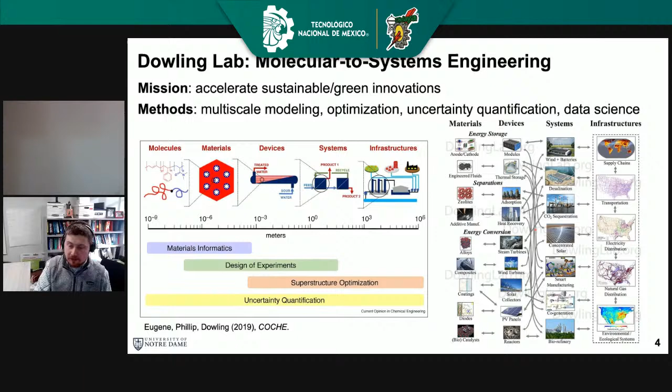So compared to my colleagues at Notre Dame, a distinguishing aspect of my group is we formulate everything as a mathematical optimization problem. So we think about writing objectives and constraints subject to either continuous or discrete variables. And we apply these to a lot of problems and collaborate with about 10 different research groups on campus. So everything from novel separations to carbon capture to additive manufacturing to desalination to systems biology, and finally to energy markets and energy infrastructure that I'll talk about today.

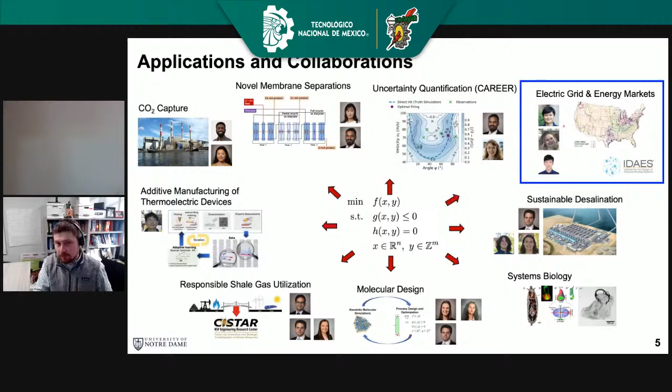Cutting across all these applications are 3 main pillars or 3 main ideas that our group works on. The first is molecular systems modeling. So how can we use models to set material property targets? So here's an example of thinking about membranes for removing lead or other contaminants from water, and understanding how much membrane material you would need is a function of 2 material properties. And this can help guide our experimental collaborators.

And the second pillar is optimizing experiments. So here we work with our experimental collaborators to think about how to build mathematical models and then apply data science tools like model-based design of experiments to think about really what's the minimum set of data that we need. And then finally, what I'll really be focusing on today is scale bridging models. So when I showed that molecular to infrastructure, how do we connect those models across scale and how do we deal with complexity? And a lot of this is using machine learning ideas.

So shown here is looking at some reaction kinetics where we have a hybrid model that contains both a simple component and a machine learning component to take care of the error in that. So I'm going to be talking about energy markets and this last column, scale bridging models, and I'll bring that out throughout the talk.

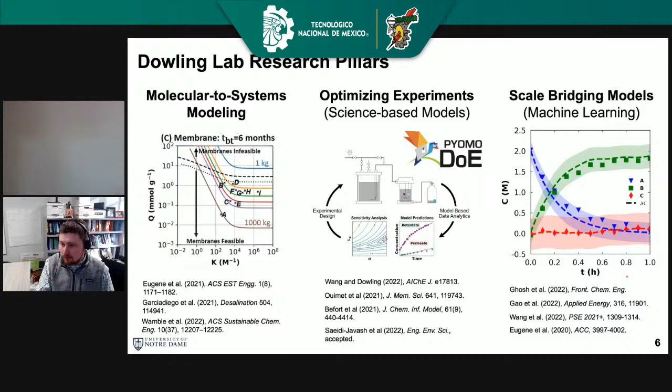In 1 second, I'm just going to check a microphone setting.

Oh, it is fine. Everything is fine. Okay, I was hearing a little bit of an echo on my end.

Okay, so now to get into the main talk. So as you probably all know, we have this really big energy transition ahead of us. There's a lot of interest in sustainability. So here's a map of the United States. Every colored box shows a different state and some of their renewable energy targets. But integrating more renewable energy is not without its challenges.

So shown here is the so-called duck curve. So what this is, is the average power demand as a function of time, from midnight to noon to midnight, for a day in California. And each line corresponds to a different year. So we see here, starting with 2012, the average electricity demand. And as each year progresses, this plot becomes more and more extreme.

There becomes less and less net electricity demand in the middle of the day, and there becomes more and more of these extensive ramping events. And this is because of solar energy, which is producing a lot in the day, but then you have these ramping events due to the sun setting. So this is one challenge, this daily variability. Other challenges are seasonal and caused by unplanned events.

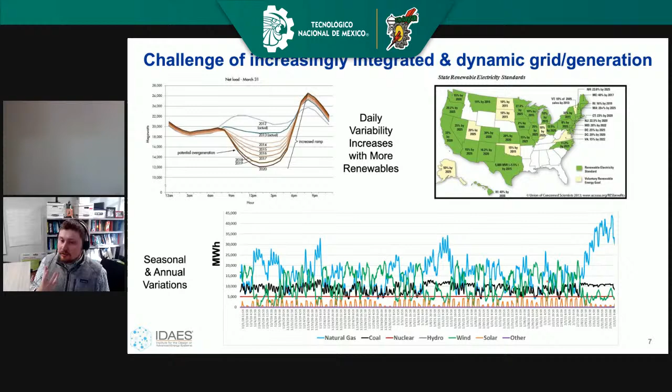So what's shown here is generation, so electric power demand in megawatt hours, shown during a blizzard event in the United States over a couple of months. And what we can see here is the fluctuation in different modes of power production. So a question is, how do you deal with this variability, this daily variability and this seasonal and up to annual variability? And one leading idea is to design integrated energy systems that hybridize multiple technologies.

So thinking about multiple energy inputs, whether it be nuclear, gas, fossil fuels, solar, wind, batteries, into this integrated system that can produce multiple products like electrical energy, hydrogen, chemicals, heating or cooling, and is integrated in a way that synergizes these different technologies and exploits their coupling to provide more flexibility to the grid.

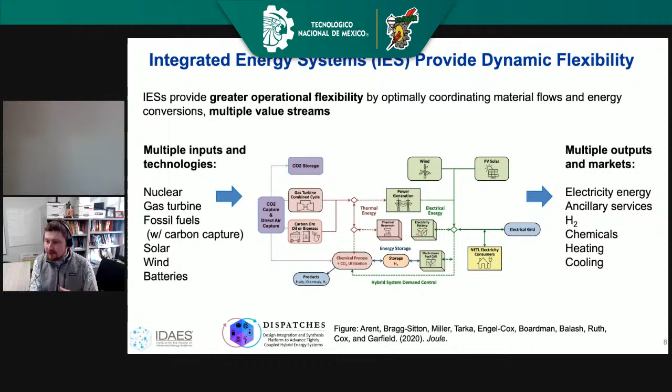So a key question here is, how do you design these systems? How do you operate these systems? And how do you control these systems? And for the rest of the talk, I'm going to discuss how we use mathematical optimization to do that. Before I get into this, I want to give a background on energy markets in the United States.

So energy markets in the United States are just really fascinating, broken up into about 10 different regions or 10 different markets. I'm going to focus on California just as an example. Every dot in this plot is a node in the California electric grid. There's about 8,000 nodes. And you can zoom in at every node, and there are electricity prices set on 3 time scales. There's a day-ahead market that sets prices in every hour. There's a 15-minute market, and then there's a 5-minute market. These are referred to as the day-ahead and the real-time market.

What these are, are histograms showing over the course of an entire year 1 to 3 p.m. prices. And what we can see is approximately normally distributed in the day-ahead market. But as we go to these faster time scales, we get more and more extreme prices, and this starts to become bimodal. Shown here is a time series over about a week. And what we see are a lot of evening price spikes, which are due to that duck curve I previously discussed. And we see a lot more volatility in the faster timescales. If you're curious, we've even done some Fourier analysis and looked at what the dominant modes are, and I'll refer you to these papers.

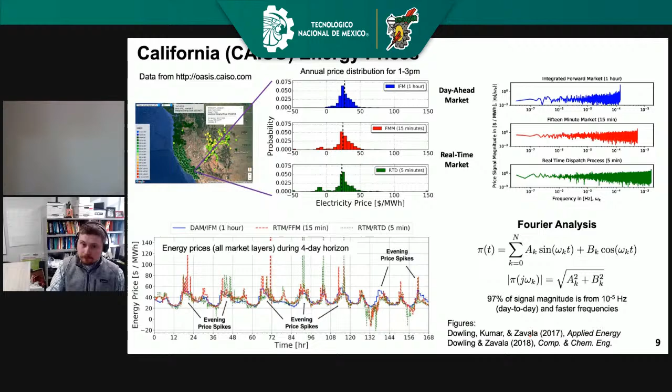So what we have in this figure is these three time scales, but now looking at them across one snapshot in California. So these are simultaneous prices, and we even see a lot of spatial temporal variability. So if you want to think about energy systems in California and prices, in 1 year, you have about 1 trillion prices. And if you just were to represent this as text files, uncompressed, it'd be about 500 gigabytes. There's a lot of localized variation at slower time scales, and there's system-wide variation at really fast time scales.

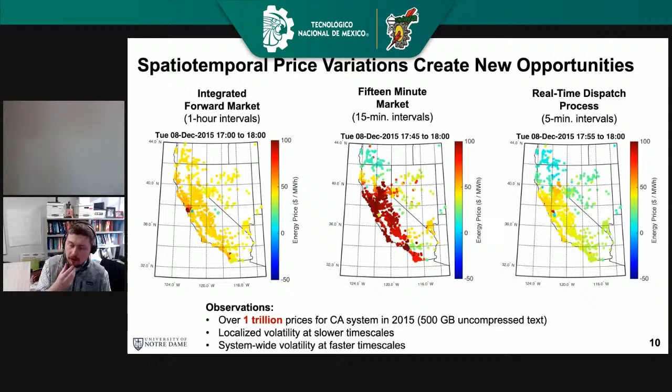There's really rich literature in the process systems engineering community about how to transact and how to interact in these markets from a resource perspective. There's a lot of scheduling literature thinking about time-varying prices. There's optimization literature thinking about reserves and interruptible loads, frequency regulation, and chemical engineering systems. So in the context of this really rich literature, I want to talk about how to make these market participation decisions and co-optimize how we participate in the market and how we design and operate integrated energy systems.

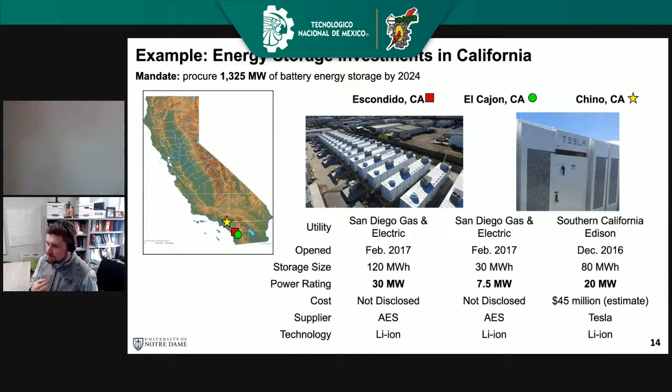So in light of these installations, we wanted to ask the question of, if I take historical price data from California, what is the revenue potential for these batteries that are being installed? If these batteries were to participate in the market, how much money could they make? So here we can formulate a variation of this price taker optimization problem, where we want to maximize our market revenue, assuming perfect information, constrained by bidding rules, constrained by the market dynamics. So we're going to assume price taker, and constrained by the physics of the battery system.

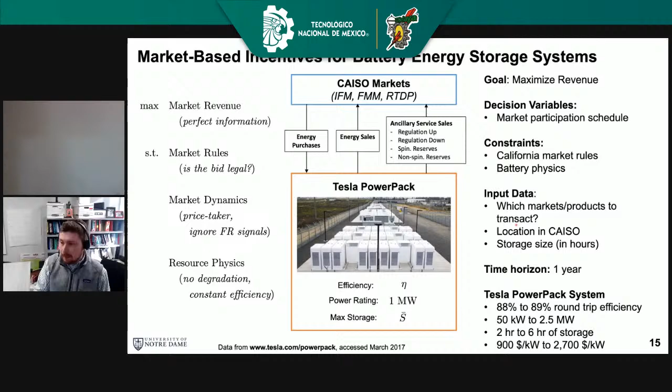So we're going to be able to interact in these three markets. We can purchase electricity, we can sell electricity, and we can provide ancillary services. And we're going to characterize our battery with some type of round trip efficiency. We're going to fix the power rating to 1 megawatt, and we're going to optimize the storage size. So our decision variables are going to be, how do you participate in the market? And the input data is going to be the prices. So we ran this analysis for a bunch of different storage sizes in hours.

So this is analysis for one node in California, one set of price data. We then repeated this for all the nodes in California that we had data for, and we're focusing on full market participation. And what we found here is there's actually some variability in the market payoff, and it goes from a 1-year payoff period to almost a 2-year payoff period. And what we found was really interesting, that the best payoff period based on the historical market prices is actually in the middle of the state.

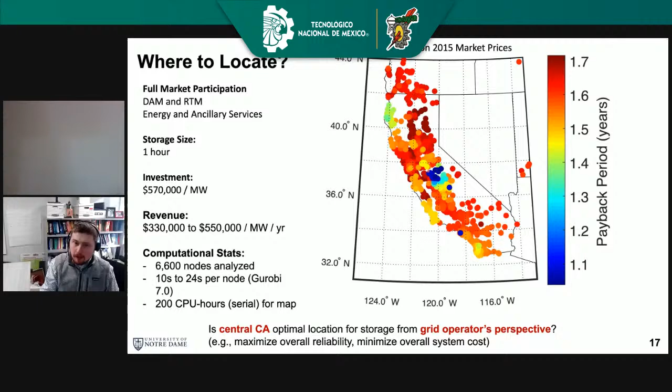So this is a nice first analysis, and what we learned from this is the importance of transacting both energy and ancillary services. And we thought about a battery, but one of the key aspects of a battery is degradation. So then in the next part of this study, we changed technologies to a sodium sulfur battery, and we extend our optimization formulation to think about degradation. So we added to the optimization model this degradation counter, that as we charge and discharge the battery, we slowly change the upper bound on the amount of energy that could be stored in the battery. So we're very clever about how to write this, so it becomes a linear program.

We can then formulate the program over multiple years. So with 5 years, you have about 4 million variables, about 6 million constraints. But because it's a linear program, you can solve it with Gurobi or other commercial optimization solvers in about 2 CPU hours. So that's actually really nice. So what we did is we then took this model and we resolved it for a bunch of different market participation modes. So what we see on this plot on the left is looking at the economics.

Each of these clusters is thinking about, am I transacting day-ahead energy, real-time energy, or in both markets? Within each cluster, there's two groups. The first group is energy only. The second group is energy and ancillary services. So what we're showing on this plot is net present value. This plot is organized the same way; it's showing battery capacity. So what do we find? Well, consistent with our previous results, we find that it's really important to provide those ancillary services. They provide a huge bump in net present value, and they facilitate a really big bump in energy storage.

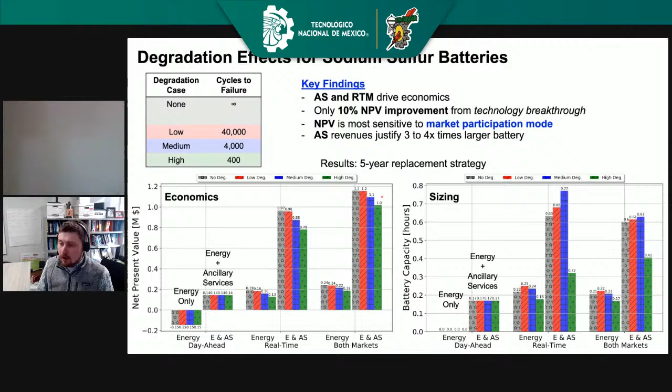You could decide to adjust your schedule for buying and selling energy, or arbitraging energy, to avoid too much cycling and to manage that degradation. We then took this a step further and resolved the optimization problem with a bunch of different replacement strategies. So do we replace the battery every 1 year, every 2 years, all the way up to every 20 years?

And then what we plotted was the revenue that we would get for no degradation and those 3 other degradation scenarios. You can also compute a very optimistic upper bound where we would expect these lines to converge for no degradation at a replacement lifetime of infinity. So this corroborates the results on the previous slide that show that you can still manage degradation over really long time scales by adjusting how you participate in the market.

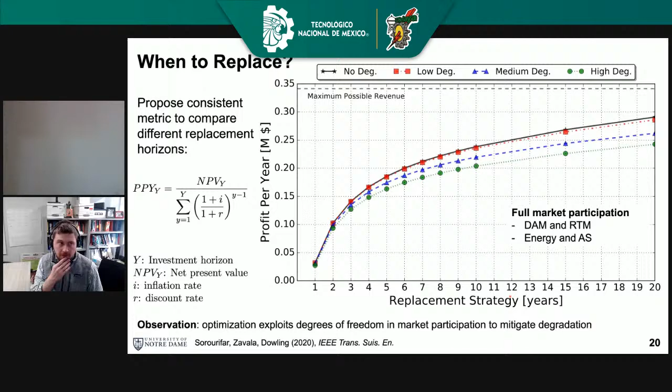So the conclusion of this part 1A of the talk is it's really important when thinking about energy systems that have storage that are participating in a market to be thinking about multiple market products, because arbitraging energy on the day-ahead market is really not that profitable. You need to be transacting ancillary services. So we've done a bunch of work looking at batteries, and we've also done some work looking at concentrated solar power plants for this.

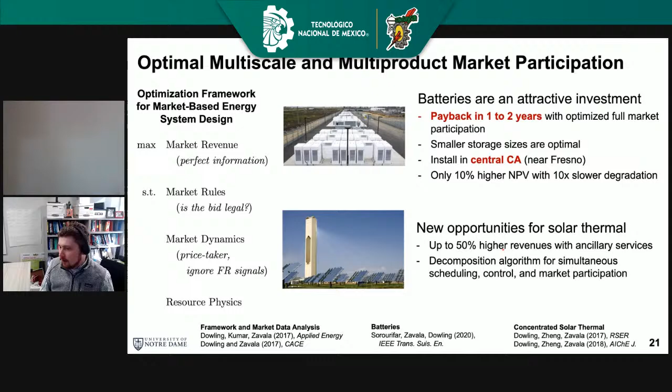Now, maybe a limitation of this work so far is we assumed perfect information. We were computing operating profiles assuming that there was no uncertainty in the market price and you could forecast the future. So that raises a natural question: what about uncertainty? So we've done a little bit of work in the group. One was to propose these autoregressive Gaussian process models to forecast uncertainty. These provide nice confidence bands. And another work that I'd like to talk about today is dynamic mode decomposition.

So I'm a member of the Society for Industrial and Applied Mathematics. And at least before COVID, when you'd go to their conferences, they'd have a book sale. And I'm always a sucker for the book sale. I almost always buy some books. So when I went to SIAM UQ in 2018, I bought this book, Dynamic Mode Decomposition. I heard a lot about it. It had a really nice cover, and I got curious.

Shortly after coming back from that conference, I had a really bright undergraduate student, Clay Elmore, ask me about research. I gave him the book and said, I have this interesting data set. Let's see what we can find from this. So what we're going to do is take these spatial temporal energy market price signals, and we're going to ask, can we come up with a really fast way to forecast future price signals using dynamic mode decomposition?

The main idea behind dynamic mode decomposition is we want to find the best small or low rank linear system that approximates a dynamic system. What I mean by dynamic system is you can think of the price at each node here as a state variable. So maybe I have 8,000 state variables, and I want to know the dynamics of how prices evolve for each of those state variables. The way that this works is you have all of your time series or spatial temporal data that you can put in the matrices X and X prime. They're just time shifted by 1.

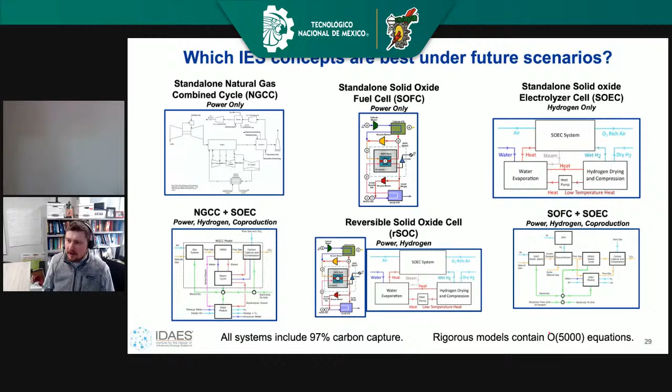And these are rigorously modeled with really very nonlinear equations in the IDAES platform. And each system has order of magnitude 5,000 equations. We're able to solve and optimize these problems, but 5,000 equations for every instance of the steady state model is a very high computational problem. So we wanted to deal with that.

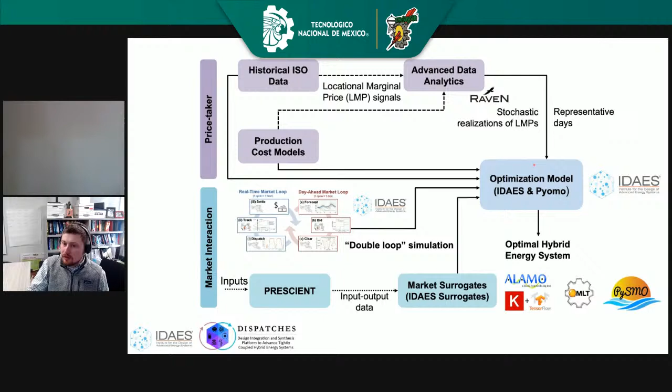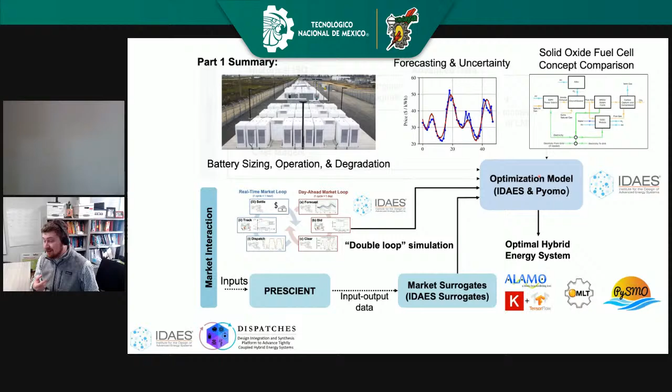So coming back to the roadmap for this talk, we started talking about the price taker up here, where we have historical data and we use it as an input for an optimization problem. We started thinking about battery sizing and operation and degradation. We then spoke about uncertainty, and then we finally talked about comparing technologies and ranking them. So a couple of takeaway messages from this first part of the talk.

So these are three really big assumptions, and using these assumptions, we were able to set up this multi-period optimization problem that we could solve really quickly, and we could co-optimize design and operation, and we could actually get a lot of insights. What I want to talk about in the second part of the talk, which won't be as long as the first part, is revisiting these three big assumptions and some of our recent work to come up with more rigorous ways so we don't have to make these assumptions.

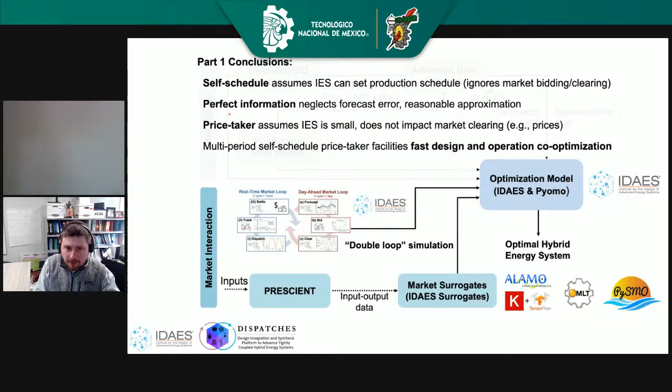So before we talk about the methods, I think it's really important to talk about models and the energy community in general. So I'm a chemical engineer, so I identify a lot with this left-hand part of the slide, where I think about building process models that have really detailed thermodynamics. Maybe we think about the dynamic operation and controls, and we do a really good job with the details of the process. But we treat the electric grid in this very cartoon notion as an infinite bus that can always take the power that we want to produce, and we can take its prices.

On the flip side are electrical engineers or power systems engineers. And they think about the subtleties in modeling the electric transmission system and how to design markets and how to clear and how to schedule a whole region's worth of generators. So these are really detailed models that are focused on the transmission, and they treat these energy systems as this really cartoon notion. Maybe they're really simple linear systems. And that neglects the process detail. And these communities and these tools are often applied in isolation.

And these cartoon representations work pretty well for traditional thermal generators, which you can model really well with these simplifications. And because the grid without renewables is fairly simple, this infinite bus approximation works really well. Where these approximations break down is in the electric grid of the future and today, where we have more and more renewables that have a lot more volatility and are causing a lot of changes to the market.

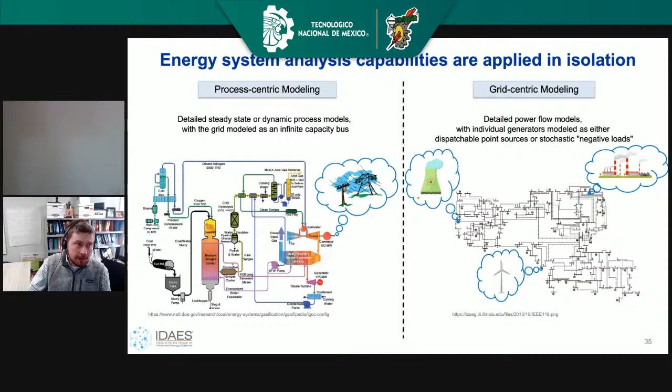So to break down this barrier and really capture the connections between these two paradigms, we came up with this so-called double loop workflow. This is a multi-scale simulation workflow that couples detailed models from processes and from the grid. So we're going to start here at the top of the day-ahead loop. We start by making some forecasts or having scenarios for future energy prices. Those are then used to solve a stochastic optimization problem to come up with these bid curves. These bid curves communicate for every integrated energy system how much power it's willing to produce as a function of market price. This is then collected for all the power plants in a region, in a network. And then the market solves an optimization problem to minimize the overall system generation costs. We use Prescient, which is an open source production cost model. This happens in the day-ahead loop once per day.

Now, these forecasts are inherently wrong. So we need to have recourse, and with that, there's a faster loop, the real-time market loop. So every hour or faster in the real-time market loop, the market resolves a dispatch problem to minimize system generation costs. That then provides dispatch tracking points to every integrated energy system that then needs to solve a tracking control problem that balances cost, health, and a tracking penalty. And then finally, that gets passed in to Prescient, which calculates where the money flows with the actual dispatch. So we've implemented this. This is available in Python using really detailed process models in Pyomo that are available through IDAES, and really detailed production cost models that are also in Pyomo available through Prescient. If you're interested, we have a recent publication on this.

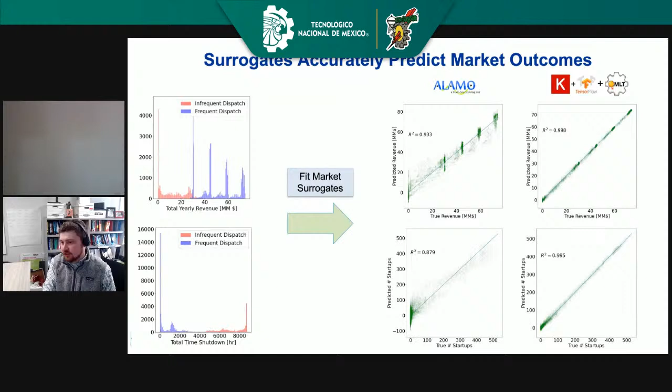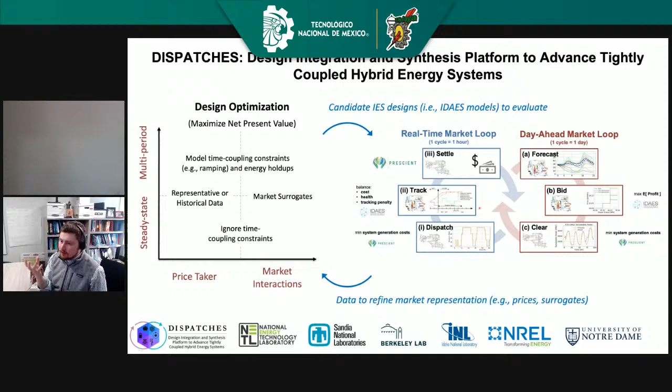We can think about formulating our design optimization problem either with price taker or with market interactions. And we can use steady state models or we can use multi-period models. That design optimization then gives us candidate integrated energy system designs that we can simulate rigorously with this double loop capability. That then provides new data that we can use to refine the market surrogates or the market data and repeat this loop. So this gives us another capability of coupling design optimization with actually simulating market outcomes.

So finally, to conclude the talk, I want to come back to our roadmap. So what we've developed are optimization capabilities that allow us to really think about how to optimize integrated energy systems within a market. We talked about price taker first, which is really good to get a fast approximation, is really easy to work with, and is really becoming the standard in the community. We then talked about the limitations of price taker and some new capabilities that couple detailed process models and detailed market models to simulate these interactions and go beyond price taker.

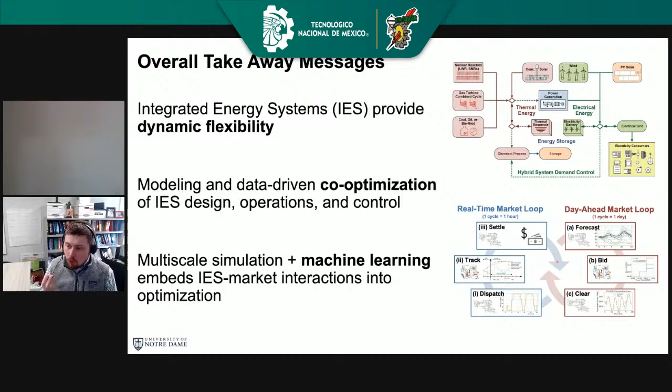So the final takeaways from this talk: these integrated energy systems do in fact provide flexibility. And as we saw with the solid oxide fuel cells, co-producing hydrogen and electricity actually makes a lot of sense under bimodal energy prices. We're able to formulate these problems with optimization and co-design design, operation, and control decisions. And then finally, we're able to take these multi-scale simulations and couple them with these machine learning surrogate models to go beyond price taker by directly incorporating market impacts into the optimization formulation.

So if you're interested in the things that I talked about, my group has a lot of recent papers in this area. I have them kind of summarized here. And with that, I would be happy to take questions.

Alex, thank you for your interesting talk. I appreciate the complexity of the problems of modeling the market. So congratulations, it's awesome work. Thank you.

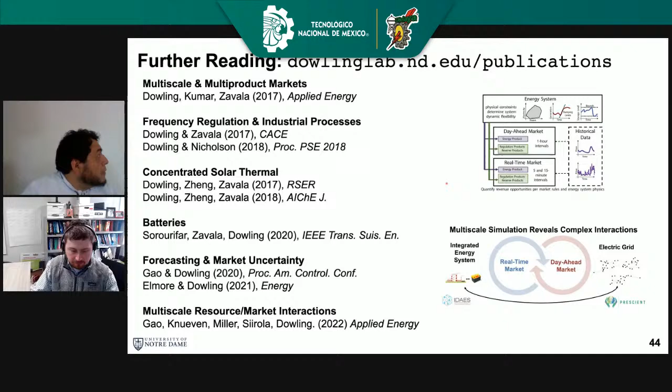So, okay, we have a problem. Yeah. Okay. So well, we have some time for some questions. So we have time for some questions. If you have any question, you can come here.

Okay. So Alex, we have a question about your data. How do you obtain this data for running your model? Yeah, that's a great question. Okay, let me jump to a slide.

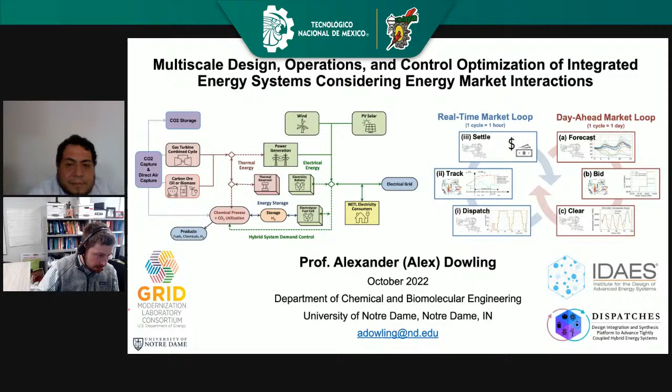Okay, so the data that was used to make this plot is publicly available in the United States. In the U.S., there are approximately 10 markets, so different geographic regions that operate these wholesale markets, and they're required to release these historical prices. So there's a website that has an interface that you can download from. Some of them are more automated than others.

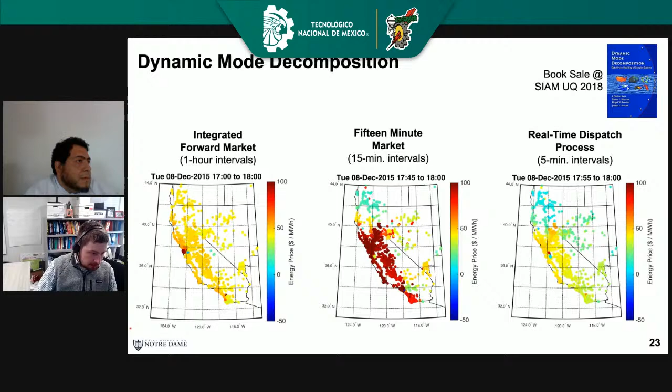When I was a postdoctoral scholar at the University of Wisconsin-Madison, I was actually able to automate some of this and scrape a lot of this publicly accessible data that's necessary to make these plots. That's one way to get historical data. You can then ask the question, jumping back to this conclusion slide: historical data is here. What about production cost models?

There are some commercial platforms that you can purchase that have data necessary to simulate different regions of the energy market in the US. That has information on all the different available power plants and some typical demands. That can be used to create data. In this project, we used Prescient, which is an open source production cost model for simulating an electric grid in a wholesale market.

And part of Prescient is an open source data set that approximately looks like the Southwest United States. That open data set's really nice for researchers anywhere around the world to be able to use. There are no restrictions on using that data. So those are the two places where we can get the data: either historical data that's publicly accessible, or we can run a production cost model, either an open source or a commercial tool.

Okay. Thank you, Alex. So, any other question?